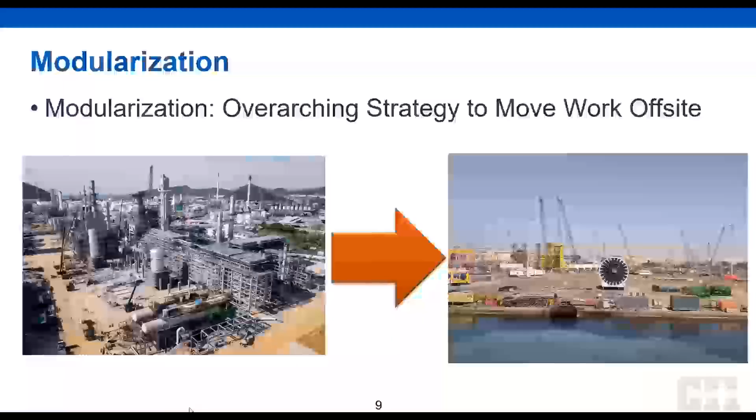So with that, we talk a lot about the off-site construction component to that modularization strategy. In that, we have three different terminologies, key terms that we use, and it will, from left to right, be increasing in complexity and size.

So we start with that prefabrication component, and it's really combining material together to create a greater component, like piping spools - flanges, elbows, pipe together to develop an overall component. Same with structural steel - it's a structural steel frame, combining primary and secondary structural steel together to create the actual structural frame.

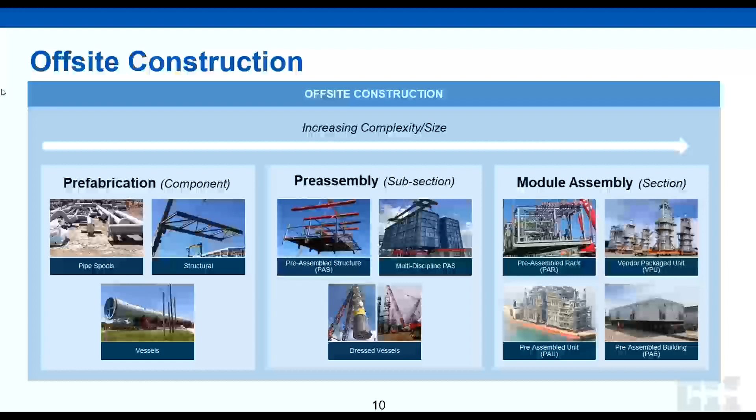So we also want to talk about design for manufacturing assembly. We talked a lot about modularization and offsite construction, but we've also heard the term design for manufacturing assembly, or DfMA. What this really focuses on is the manufacturing and assembly aspects for a product - looking at design for manufacturing and design for assembly and combining those two together to improve quality and cost.

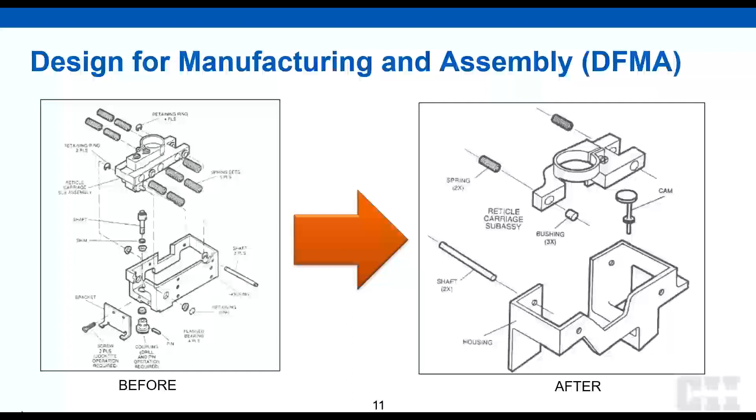Now for a modularization project where we're talking about offsite construction, what we really want to focus on for the design aspect is designing for fabrication and assembly. That could be designing, say, your structural steel, bolted versus welded - looking at the fabrication processes they use and adapting them to your design. Same thing for the assembly portion.

Assembling your module together or assembling your pre-assemblies together means looking at what those assembly processes are and implementing and designing them into your overall product, your overall module, your overall pre-assembly. For modules, that could be pancake assembly or block assembly, depending on what they use. Then there's designing for transportation - looking at the design factors, whether going over land or over land and water, and what accelerations you need to incorporate into your design early on.

And then design for installation. So looking at your modules or even your pre-assemblies as they're coming in, and how are they being set onto the foundations, and making sure that your design can accommodate it. Are they being lifted on or rolled on? Make sure that if they're lifted on, the lifting lugs are designed appropriately, or if they're rolled on, you've got the self-propelled modular transporters, or SPMTs, accounted for.

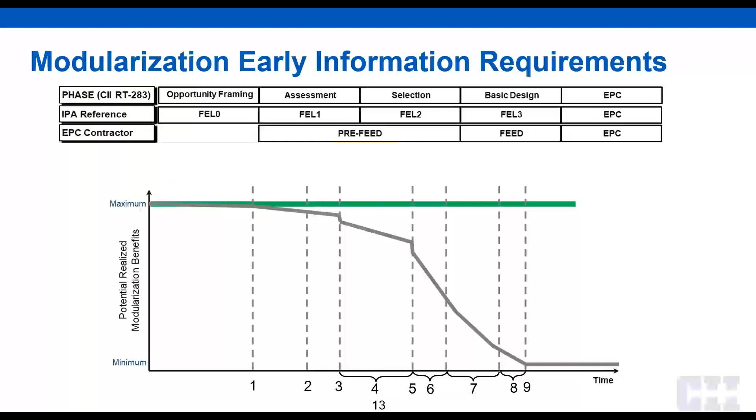Okay, next slide. I wanted to highlight that earlier development of your module concept and modular key plot plan shows the importance of looking at your early path of construction. In that early DBM phase, your early path of construction and module sequence is key, because it sets your schedule, your planning, your priorities for engineering and supply chain in the FEL3 phase, and of course in detailed engineering.

Commissioning and startup priorities feed into your path of construction and module sequencing. That feeds into your work packages, whether module or construction work packages, which feed into engineering work packages and supply chain, and then into your engineering deliverables and delivery times. This is all very key. When doing path of construction and module sequencing, engineering and supply chain need to be involved because they may have constraints that require changes to the path of construction or module sequencing.

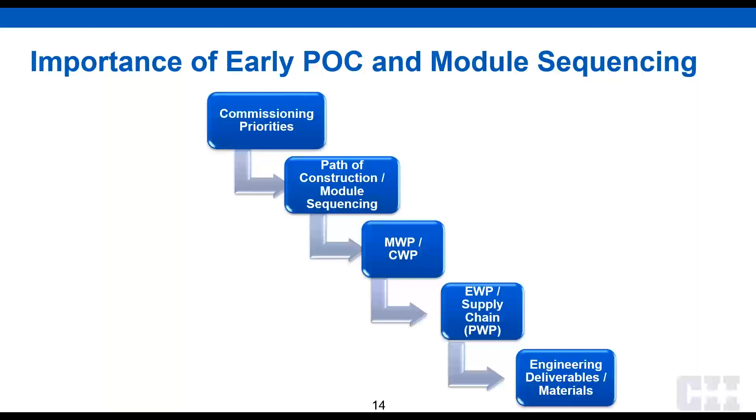So how are you actually going to roll it in, making sure you don't have any interferences with cranes, foundations, current work going on at the site, and any other components that may be happening around the time that module arrives. This gets missed a lot, so it's very important to look at both the path of construction and module sequencing during that workshop.

And again, it should be done earlier on, and then you're going to be validating it throughout that project lifecycle. Okay, next slide.

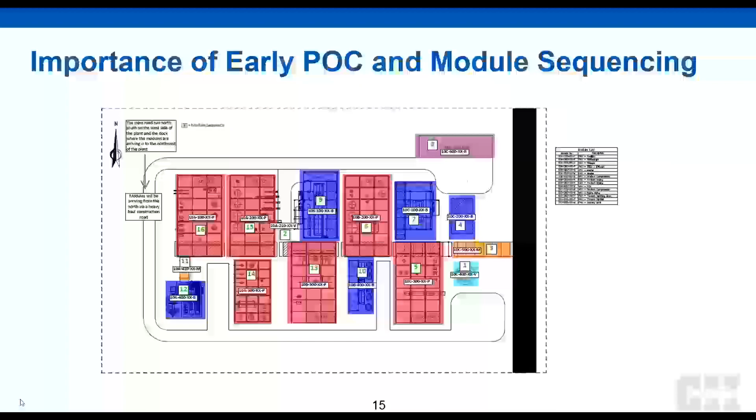The module envelope and limitations, and that preliminary module definition, are key success factors to be done earlier on, making sure you actually understand and lock in what they are going to be, what you can transport and actually put onto your site.

You need to make sure you have alignment on the actual modularization driver - why are you doing modularization, why are you implementing it on the project - and alignment on that concept throughout the whole project lifecycle, because you'll get new people coming onto the project all the time.

And then your owner's planning, resources, and processes. This also includes the EPCs, making sure you have modularization resources with that expertise and experience, as well as those processes. Very key, because it gives everyone alignment and direction on how they're going to perform the modularization.

And then the timely design freeze - I talked about that in the previous slide. Extremely important to have that design freeze at the end of basic engineering, with really only mandatory changes implemented in the detailed engineering phase. So just focusing on how that would work and making sure you can manage that.

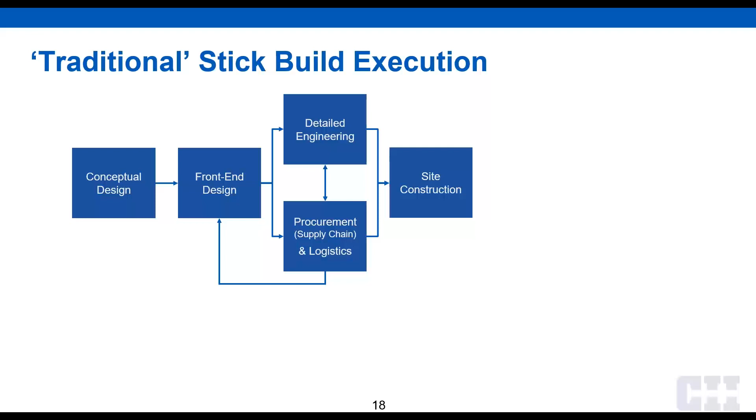But what we're increasingly seeing is that stick build isn't the default strategy. When we take into account the full range of modularization through the componentized prefabrication to pre-assembly to the modules themselves, almost every project has some sort of element of offsite build or modularization. So when we switch to that strategy, we see that the picture changes.

We've introduced two new execution stages: fabrication and assembly, transportation and logistics associated with moving those modularized elements to the construction site. We've increased the number and complexity of overall work processes and execution workflows in our effort to reduce the complexity and number of work hours at the construction site, which is comparatively less productive or more expensive, and take those hours away from the work front.

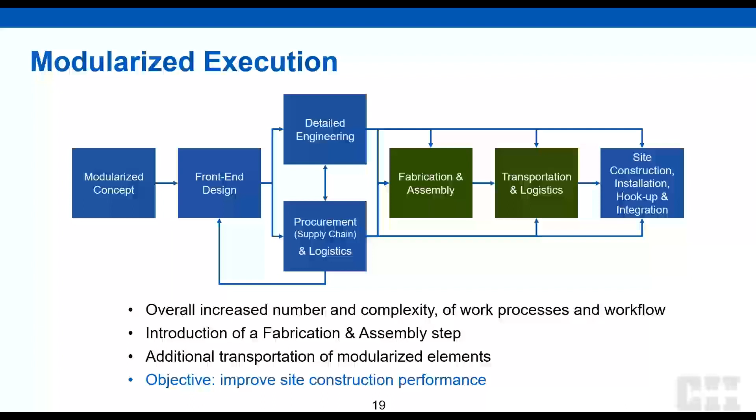So as you can see, modularization and AWP have the shared aim of improving overall project performance, in particular at the construction site. But in doing so, we must recognise how our overall AWP programme must also be modified. So in the next few slides, we'll quickly run through some of the key differences and objectives in each of the project phases that we need to think about for the AWP programme in order to enhance the overall modularized execution strategy.

In developing the modularized concept, we need to assess both the level and maturity of our organisations that will be involved in the given project locations and the expected contracting strategies. So that's owner teams, main contractor teams, fabricators, others in the supply chain, site contractors, and how AWP may be deployed for both the modularized and the remaining site constructed scope. This expands our use of the available tools and technologies between more organisations and impacts the options available and the requirements that need to be set.

Execution, as we've seen with Cathy, for a whole set of new reasons with AWP, must be planned from the earliest possible moment, and therefore that same early definition is required. Here, module and construction work area definition overlaps, and as Cathy mentioned, so does the path of construction and the module installation sequence. Module and AWP coding structures are crucial for packaging the scope. That has to be seamless, and the identified data that's generated has to be able to be managed by the tools and technology available with the executing parties.

We have to recognise that the front-end design is the foundation on which detailed engineering and downstream stages are built, and then we have to plan at the conceptual stage and set the requirements of the front-end design. With these factors in mind, it's always important to identify ambitious but ultimately achievable goals against which to manage your performance at the following project stages.

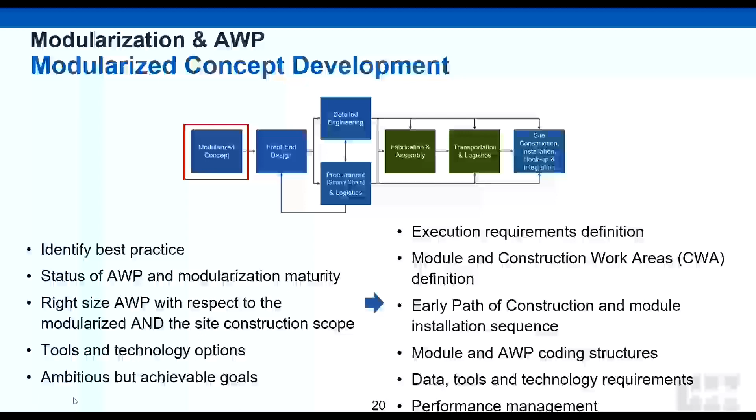In front-end design, we define the construction work packages and the execution sequence. For modularized execution, they must now be adapted to include the module, hookup, and stick build scope. And the construction work packages need to reflect both the fabrication sequence and the site construction sequence. Easy to say, but in reality, this adds a massive layer of complexity to the planning effort.

Our focus on productivity and performance improvement through design and front-end planning needs to take an integrated view of the fabrication and assembly locations as well as the construction site, and recognise the scope and the way the scope is packaged and the handover between those fabrication locations and the construction site through transportation and logistics.

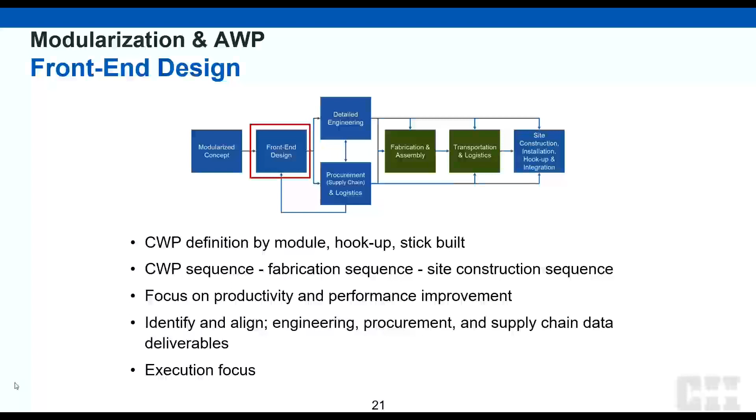Another key point here amongst many is to ensure that engineering and procurement plan to deliver for both the fabrication and the construction locations, and importantly recognise the differences in the deliverable content and timing for these different locations to suit either the fabrication sequence or the site construction sequence.

Moving along the diagram then to engineering and procurement, we've already established that both fabrication and construction are the customers here. Now the crucial point is where we must ensure that engineering and procurement execute this more complex AWP plan. This is the first point, beyond getting things defined properly, where the modularization strategy can fail due to the knock-on effects of getting this part wrong.

We need to ensure the right deliverables, and that's right in all senses of the word, completeness, quality, integrity, at the right time. Using that, we can create and manage flow that successfully supports the downstream fabrication and site construction.

Can we manage the newly created and actioned process of data creation and the digital interfaces between organizations at this most complex point? Can we, in short, through fabrication and construction, influence project management and project engineering to incentivize or reward and manage engineering and procurement performance against AWP delivery rather than just pure deliverable progress?

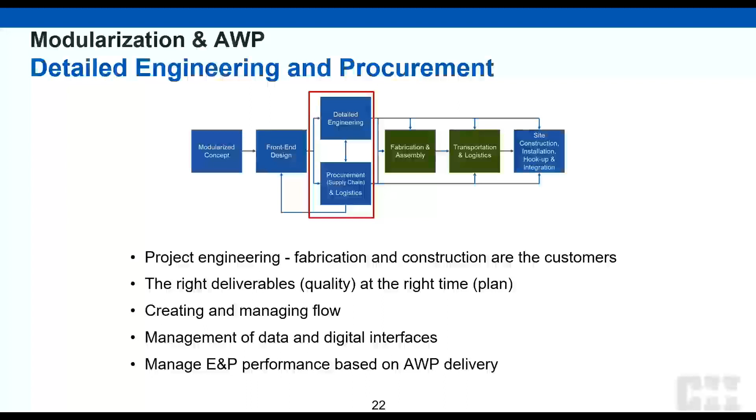Moving on then to deploying AWP at the fabrication and assembly location and the definition of IWPs within fabricators' construction management systems. Experience tells us that AWP done right will enable fabrication to undertake production planning in that more factory-like environment, to match resources to scope in a timely fashion, and ultimately enhance our fabrication performance if CWPs from engineering and procurement can be released as per the expected plan.

In turn, fabrication through transportation logistics has to recognise that site construction is the next customer and has to be completely completions focused, such that modules as part of site construction CWPs are delivered predictably per plan with no surprises, ready for site installation.

Another key point here, often forgotten, at least until it's too late, is the scope that lies between module mechanical completion and pre-commissioning at the fabrication location and the eventual site installation. That is the packaging, the preservation, the loadout, transportation, the offloading, the reinstatement, which in itself is a project, all of which has to be packaged and managed as part of the AWP program.

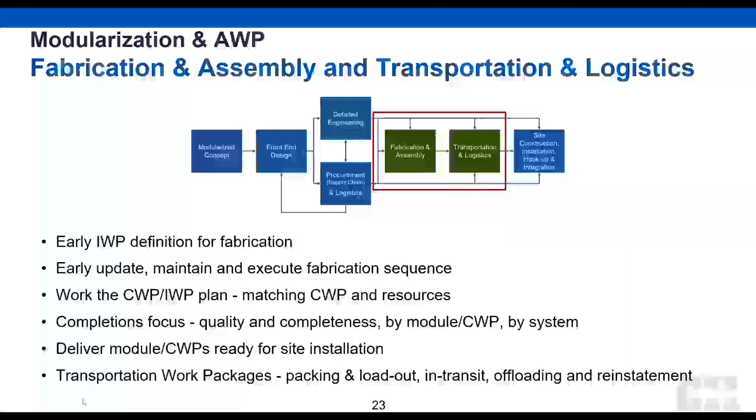So lastly, we move on to the site. So I went a bit too fast there.

Lastly, move on to the site, where infrastructure and civil CWPs must be delivered to support the module installation sequence. And fully informed and in a timely fashion, a construction team can ultimately manage IWP execution of the site scope, and ultimately, having gone through all these steps, realize the intended original improvement required in project performance at the construction site.

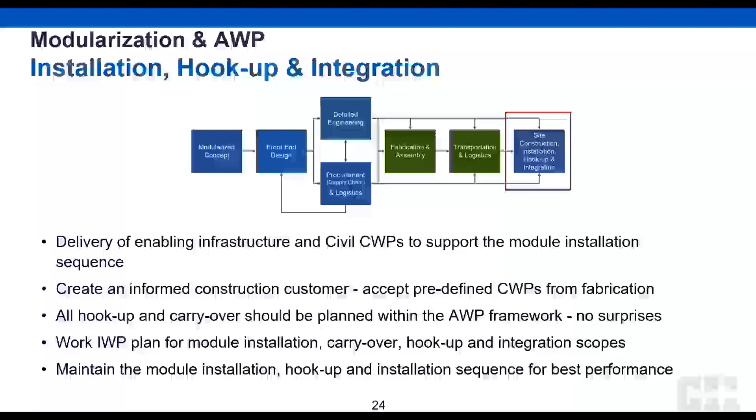So to summarize then, AWP and modularization are complementary, working together to improve the overall site construction performance. We have opportunity to think about the work processes and workflows which support packaged downstream delivery of scope between these steps. In doing so, we have an additional opportunity to introduce lean ways of working to these work processes and workflows. And with that, I'd like to hand you over to Pete, who's going to take us through some of those lean ways of working.

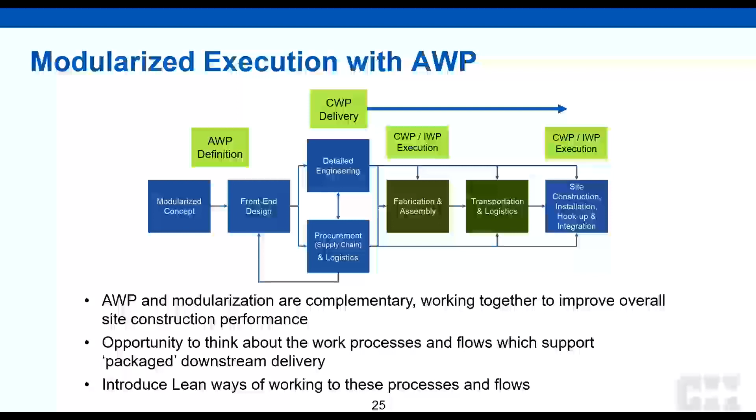Thank you, David. Excuse me.

So as you see on these slides, I will discuss delivery of engineering, procurement, fabrication and assembly, transportation and logistics, and site installation in relation to design for manufacturing assembly, pre-assembly using product family concept as part of a workflow system, TAKT planning in construction, ergonomics, demand fulfillment and postponement, and overarching production systems in construction.

And because there is a lot to cover in the time available, I've produced a list of reference research at the end of the slides that can be used to explore for further knowledge and understanding and how lean themes relate to what's discussed today. And also those papers themselves refer to extensive further research that underpins the discussion today, primarily in the International Group for Lean Construction agenda.

So aims and objectives. The overarching aim is to transform traditional construction processes into one based on technological innovation, in essence transforming traditional construction into a modern process of assembly. And that's using DfMA, as has been discussed, within an integrated digital delivery strategy, engineering within the model environment, on-site assembly of modules and kits of parts to form complete systems. I predominantly focus on MEP.

Within ergonomic workplace-designed work cells in a synchronized production system, with the aim of resulting in fewer on-site operatives carrying out safer, more productive and simpler assembly tasks for a shorter period of time. And the production system talked about today has been implemented on both industrial and commercial construction projects, so they are applicable.

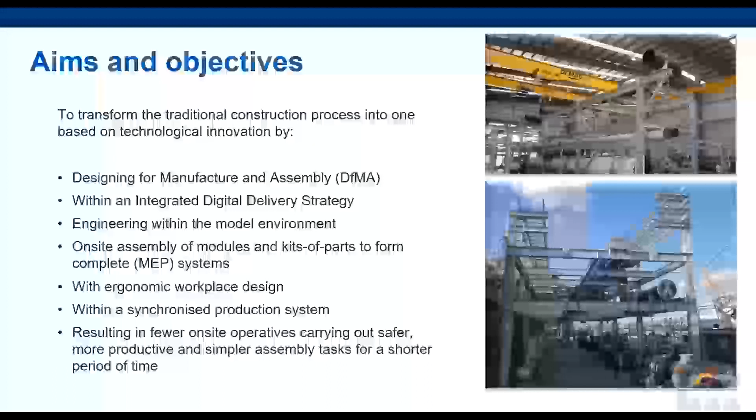Okay, so talking about design, delivery of engineering and procurement, and Cathy's touched upon this, as has David. The most benefit is gained from early involvement. But just to talk about this DfMA design funnel, as I've called it, you will see the two colours, the red and the grey, or the outer and the inner. And the inner funnel benefits from strategic and technical solutions early. In other words, there's less scope for iterative design.

So through those generic design stages of concept, developed design, technical and construction design stage, you go through this process of iterative design, increasing definition, integration and detailing for manufacture. And to make this a success, the inputs to that are customer requirements, the core values of the particular project, overarching aims and objectives, DfMA guiding principles, design parameters and ground rules, all of which can be developed with a common understanding within the team.

Designing around product families and pre-selected products, DfMA design guidance itself, and other manufacturing techniques such as ABC parts analysis, early equipment selection, and really understanding DfMA benefits criteria. In commercial construction, DfMA can be viewed to add cost and add time, so you really have to understand what the benefits are to convince the stakeholders that it is in fact the right thing to do and not just something to do at that stage.

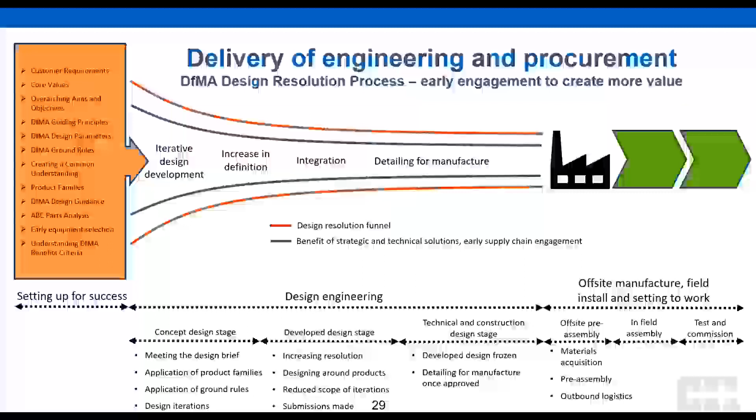So yes, there's plenty on that slide, so I won't discuss it all, but we can move on to the next slide.

So if you take MEP, you've got the larger end of the system, which is plant rooms. So that gives you volumetric plant rooms, plant equipment modules that fit inside pre-constructed plant rooms, vertical distribution, risers, horizontal distribution, terminal distribution modules, fan coils, VAVs, etc., electrical modular systems, whole volumetric spaces, and the balance of kit of parts, which is everything else that interconnects modules and connects modules to other devices in the facility.

Okay, next one. So delivery of fabrication and assembly. So DfMA is more than just pre-assembly or off-site manufacture. There are thousands, if not millions, of parts to be managed in construction processes. So in construction, the supply chain can be categorized using ABC parts classification from manufacturing. You will see that modules will be category A, where there are lower quantity, but they are higher value and they're generally made to order.

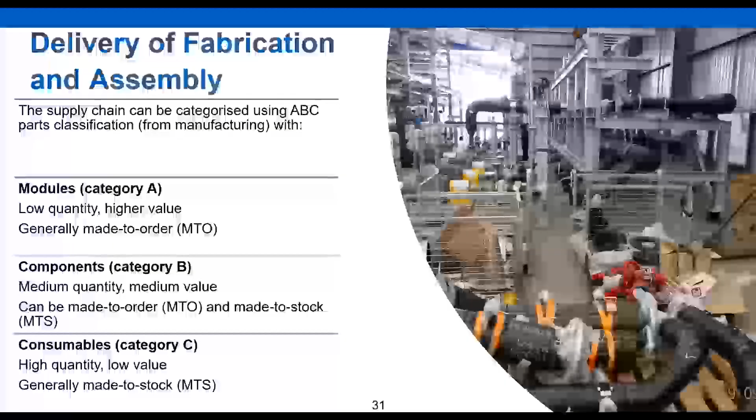Next slide, please. So transportation and logistics. So at the bottom, we've got the on-site construction assembly process, and that has to be fed by the categories of materials discussed. So type A, parts made to order, type B, parts made to order, and then type B, parts made to stock, and type C, parts made to stock. And those need to be protected with safety lead time, as you'll see on the left, for made to order items, and safety stock for made to stock items. And you can see the red demand signal from the construction processes and the black demand fulfillment signal.

Now, if you want a just-in-time process, then postponement function can be used, which in essence means delaying delivery of the particular part until the moment it's needed. So you don't have the workers looking around site for various parts or waiting for things. They have to be available. So that is achieved, as I've said, with safety lead time for manufactured items and safety stock. So materials are always available. And this can give rise to the use of demand fulfillment centres. And one of the best examples in the UK of that was used in the London Olympics in 2012, which managed all the material flows into the various developments that form the Olympics.

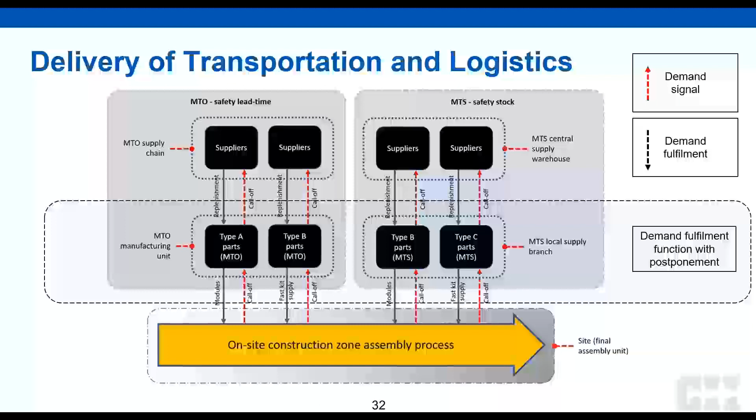And that is supported by purpose-designed mobile work cells that are ergonomically designed to ensure that the work is designed to fit the worker and not the other way around. So as much as possible, all the work is designed to fit within the physical range of the operative. And that means that as a natural byproduct of that, productivity goes up for the individual and their health and safety well-being goes up as well.